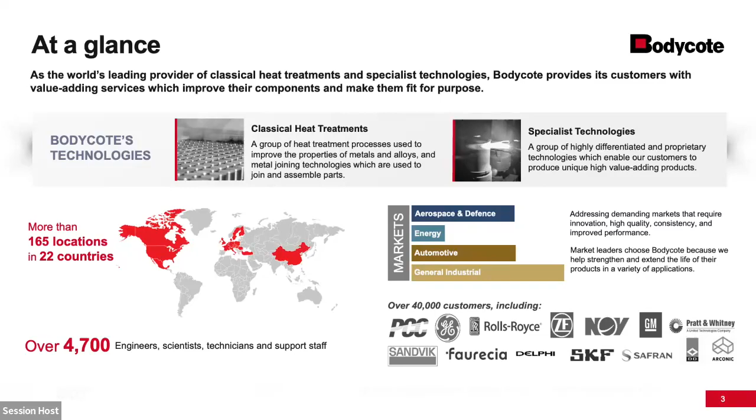Additive manufacturing might be a little basic for some folks, but over the last 10 to 20 years it has really blown up. We never used to consider traditional machining as subtractive. Now that we're in the additive world, some benefits include greater design freedom compared to conventional casting and machining, lightweighting, designing parts so material is applied only where needed, and better buy-to-fly ratios, which you have to think about with airplanes. You can combine parts into one, including new functions such as complex channels, which eliminates brazing and possibly EB welding or friction stir welding. The net shape process also helps reduce raw material use compared to machining.

Typical alloys used in the additive world are aluminum, titanium, cobalt chrome, maraging steel, nickel steels, and copper. All of this material needs post-processing before you can put it on an airplane, in a body, or wherever.

Adding value to additive manufacturing: Bodycote provides a complete service solution for metals built by additive manufacturing, including stress relief to minimize distortion and residual stress. We can EDM to prepare the component for hot isostatic pressing, also known as hipping, plus heat treatment and HIP to remove microporosity, along with associated quality assurance testing.

If you look on your left there, that's a typical build plate with some nozzles. The value add is a reduction in rejection rates and inspection costs. Fatigue properties are on par with wrought material, with significant improvement in fatigue strength, fracture toughness, and tensile ductility. A 100% reduction in porosity is possible, along with improved machined surfaces with consistency and properties.

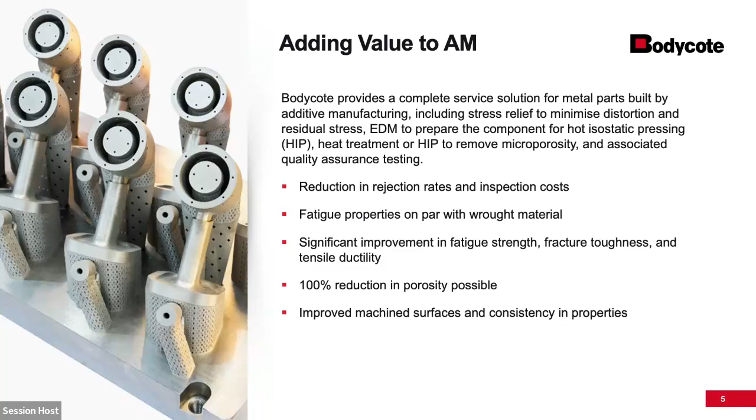So the process: metal additive manufacturing really boils down to two things, blown powder technology, DED or LMD, and powder bed. Most of what we see is typically powder bed technology, which can be broken out into electron beam melting (EBM), laser beam melting (LBM), or inkjet binder technology.

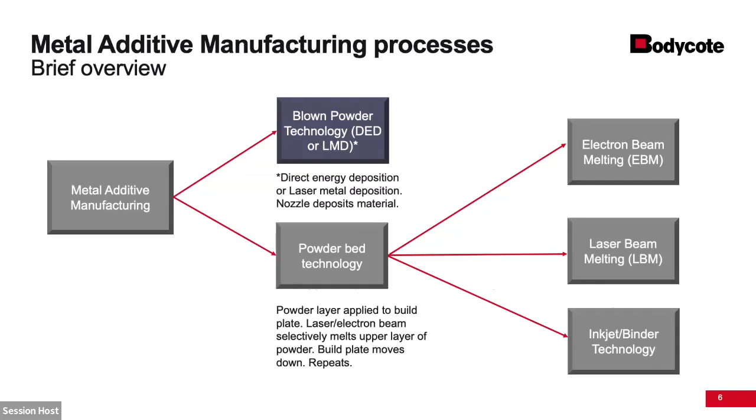So the value add portion, how do you get from the CAD design to an airplane? You've got your CAD model, your powders and grades, then you build your plate, and then the value add comes in with your heat treatment.

Your first step is a stress relieve. Then you roll it into a HIP for hot isostatic pressing, which gets rid of the porosity, followed by heat treatment to improve the microstructural properties. You wire EDM the part off the build plate, and the build plates are reusable. Then you do a materials lab and metallography analysis, and your parts are generally good to go on an aircraft.

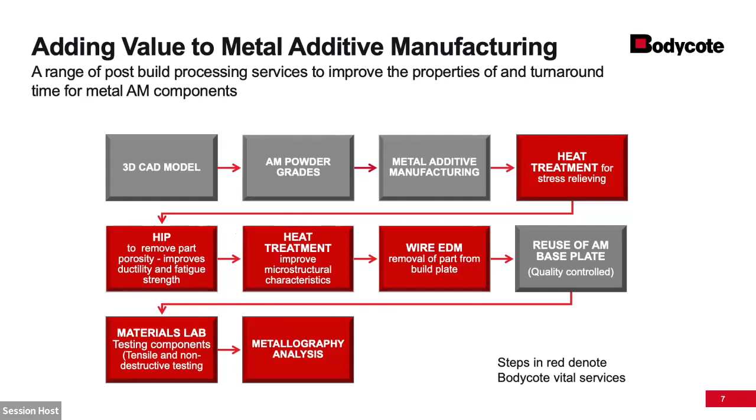Hipping, not sure how familiar you all are with that, but it's an absolutely necessary process. Turbine blades and vanes from the high temperature section of jet engines are routinely hipped to ensure freedom from microporosity. HIP is used to optimize the properties of the latest generations of single crystal and directionally solidified investment cast blades. Bodycote can work on cost-effective development of metals using HIP technology.

A few of our processes are trademarked. Densal is aluminum densification - not many people can do that, but we can - as well as densification of superalloys and titanium castings. Powder Met is the manufacture of complex net and near net shaped powder metallurgy components from novel materials. With Powder Met, we take the material, put it in a can, HIP it, and you end up with a near net part. We also offer HIP brazing and HIP cladding.

So if you're not familiar with a hip vessel, if you look to the left, it's generally a very tall cylinder. The part in the middle is your can. You load your parts in there.

We can run up to temperatures of 2000 C with isostatically applied gas pressure up to 45,000 PSI, so very high pressure. It's used to eliminate porosity in castings and consolidate powder metallurgy materials into fully dense components. Dissimilar metals can be bonded together to manufacture unique, cost-effective parts.

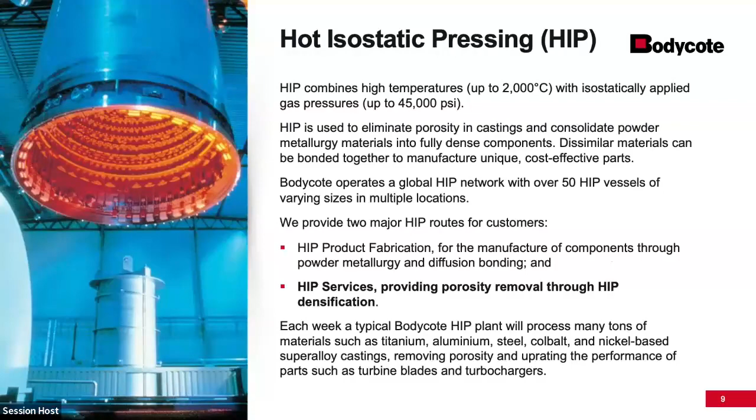So build plate removal and other value add. The parts are generally built up on a plate, and we have an alternative to standard EDM machine or bandsaw to cut the parts from the build plate. You maintain part integrity by ensuring the parts are undamaged during the cutting process.

You can separate laser powder bed fusion from large build plates up to 500 kilograms. The typical build plate when Additive came out was about 350 millimeters. They've grown significantly over time, and build plates are checked, serviced, and can be used again and again until you exceed your part thickness of the build plate.

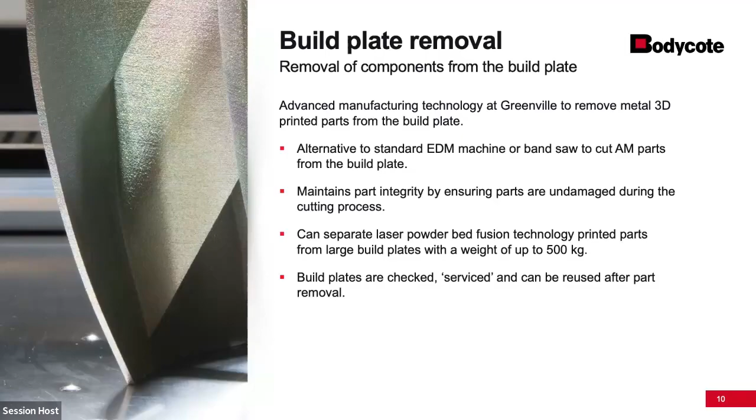So component journey - here's a typical part. You've got your 3D printed part. After that, the plate, you've got to build up.

It'll come over for a stress relieve, typically in vacuum. After that, the part will be EDM'd. It travels over to a hip for densification, back to a vacuum furnace to get your mechanical properties, off to a test house. After testing, maybe a final machine, and onto an engine blade somewhere on an aircraft, or from a medical standpoint, same thing - your hip, your elbows, and whatnot.

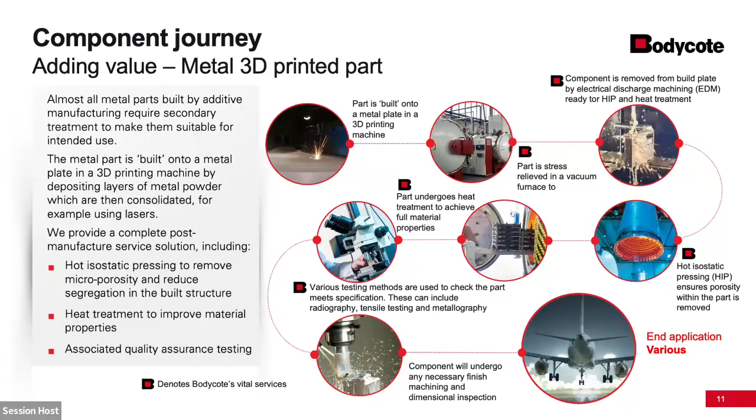So Bodycote Additive Centers - aerospace and defense, we're on commercial jet, space, military aircraft, armory and munitions, automotive, a lot of motorsports, cars and light trucks, motorbikes, heavy trucks, GI, general industrial, medical, food and beverage, tooling and mining and energy, stationary turbines, nuclear, oil and gas, and renewables.

Our biggest market right now is the aerospace and defense. Energy's quickly catching up, and space is a big one, just because you can scale up for space a lot easier than you can high production.

So Bodycote's Additive Centers of Excellence in the States. Greenville, South Carolina is a full service model, vertically integrated with hip production and vacuum. Cincinnati - product development, vacuum and aluminum. Berlin, Connecticut - vacuum and aluminum.

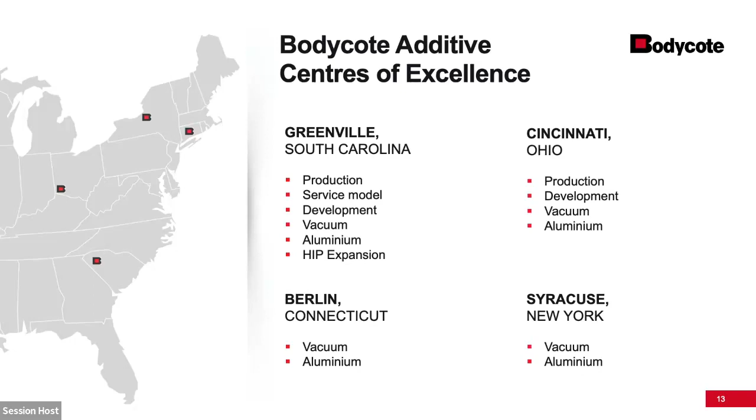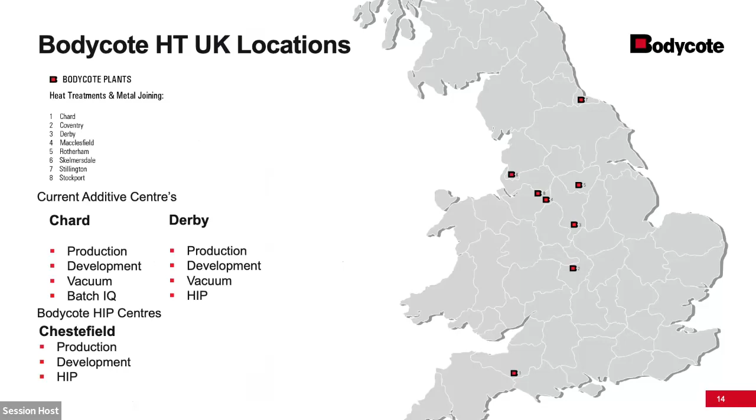So we like to take the heat treat away from you guys. Of course, it benefits us, but it helps with the carbon footprint. And we're supported with 4,700 employees, a lot of PhDs, metallurgists on staff to support your AM needs.

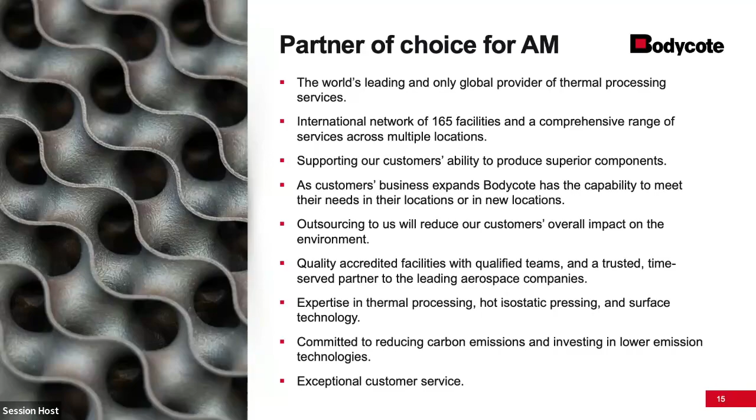That's a quick overview for the value add portion.

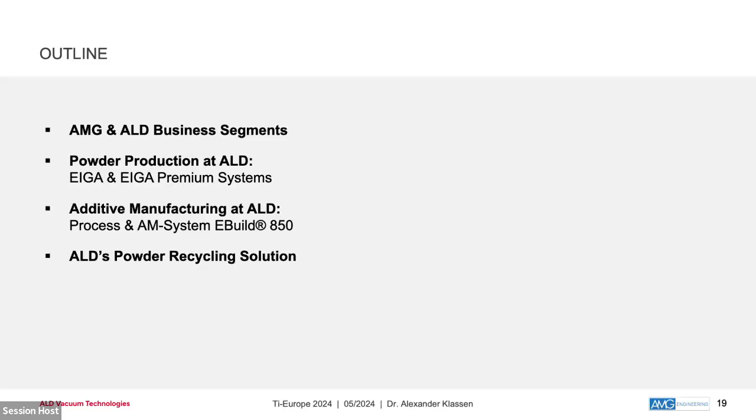A few words on AMG. This is the parent company of ALD. The two first main business segments are AMG Lithium and AMG Vanadium, so producing specialty materials, stretching out from mining activities to the processing of raw materials and pre-products. And this is accompanied by a third business segment, AMG Technologies, where we have all the machinery to process these materials.

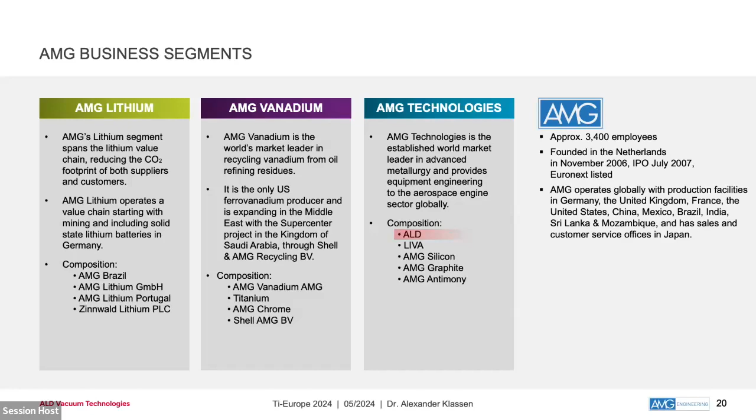So one of those companies in AMG Technologies is ALD. We are located near Frankfurt in Germany and have roughly about 900 employees. Our products are mainly in the segments of metallurgy and heat treatment. And the next slide, I'll show you the products that we offer. We offer also services to automation, after sales, melting services, and heat treatment services.

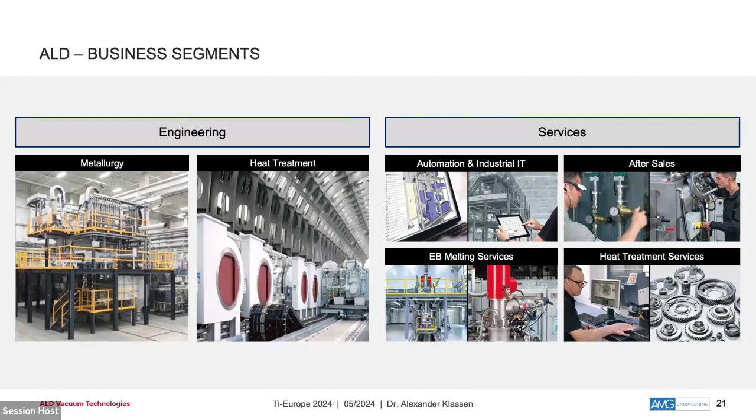This is just a brief overview of the machinery that we offer. We have systems for casting, for melting and remelting and refining, but also for heat treatment, coating, and even powder atomization. I will today focus on one of the systems shown here: a powder atomizer, and one very new system that didn't even make it to this overview, an additive manufacturing machine.

The process chain that I want to focus on starts at a raw material, some sort of prefabricated rods or ingots that are fed into a powder atomizer to produce metallic powder. And this powder can be used for various applications, amongst others, additive manufacturing.

So these are the two production systems. I picked an EIGA system, and I will show you later what it is and how it works. Of course, you can produce powder in various different ways. Naturally, the powder that comes out of an EIGA system cannot only be used for additive manufacturing using a powder bed, but it can also be used for metal injection molding and other processes. On the other hand, our additive manufacturing system cannot only utilize powder from an EIGA system—the powder can come from different sources. It will become clear during the course of my presentation why I picked those two systems.

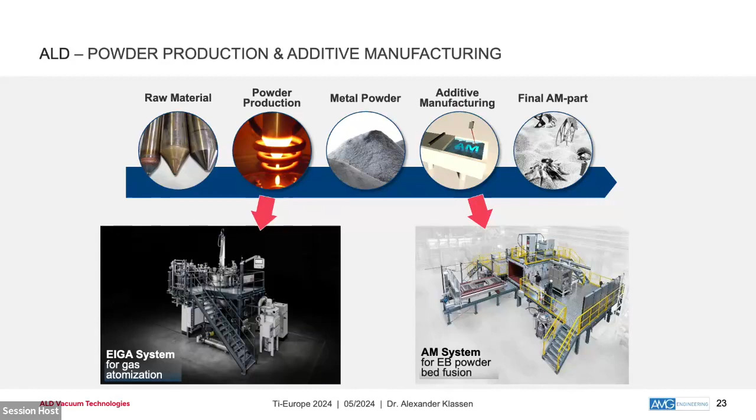So first, an EIGA system for powder production. Where are the benefits of this system? The action takes place up there where the melting chamber is and the nozzle is located. Down there you have the atomization tower where the molten powder falls in, and the collection system and sieving systems. The benefit of this system is that you atomize without having contact to a mold or a die. So you can produce powder that is prone to take other materials like ceramic particles or the like, and have a high purity of your material.

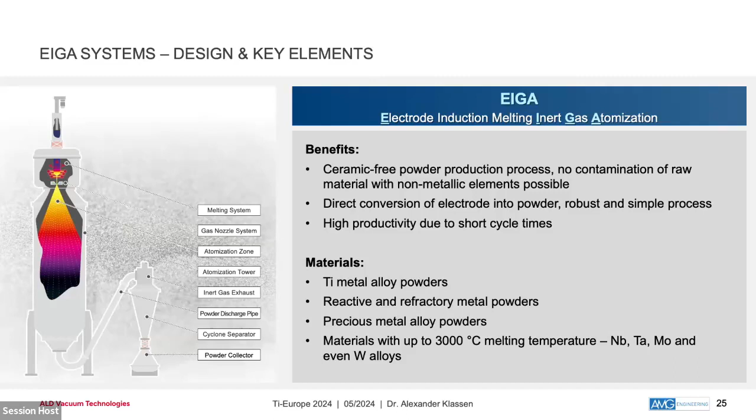So it's very much advantageous for reactive materials like titanium in this case, or also for refractory metals. The raw material or pre-processed material is an electrode feedstock—here it's just a rod with a conical tip. This is introduced into an induction coil that heats up the rod, and the melt stream that forms at the tip of the rod falls down and free falls through a nozzle without having contact to any other elements of the machine, and is then gas atomized using an inert gas stream.

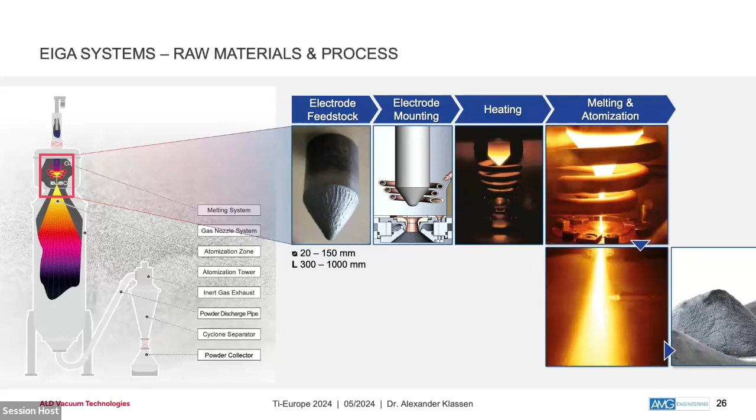Basically, we have two different EIGA systems. The standard system, which operates with hardly any overpressure in the melt chamber above, but then uses a high amount of inert gas for atomization. Here we can reach D50 values of 60 to 150 microns. So it can be set specifically where it is needed.

The second system is pretty new. It's an EIGA Premium with a modified nozzle system. It has a pressurized melt chamber with up to 25 bar, and for that a much reduced specific gas consumption, which lowers again the carbon footprint. The D50 values reachable are between 20 to 80 microns. So we have a shifted range of particle sizes that are achievable with this system.

Just to give you an example, this particle size distribution was produced for selective laser melting, so powder bed fusion process using a laser beam. The blue curve shows the standard EIGA system, and the green curve shows the EIGA Premium. So with the standard system, we can achieve a yield of about 40% that is usable for selective laser melting—the rest is out of spec, either fines or too coarse powder. With the EIGA Premium, we are now able to shift this and increase this number to over 60%.

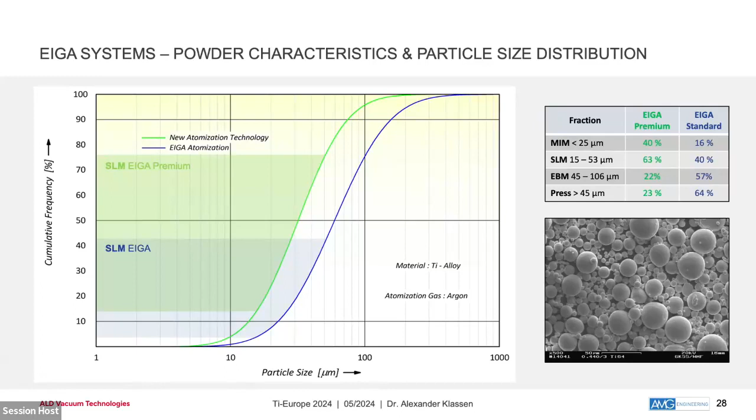You can do various things, amongst others, put it into an additive manufacturing machine.

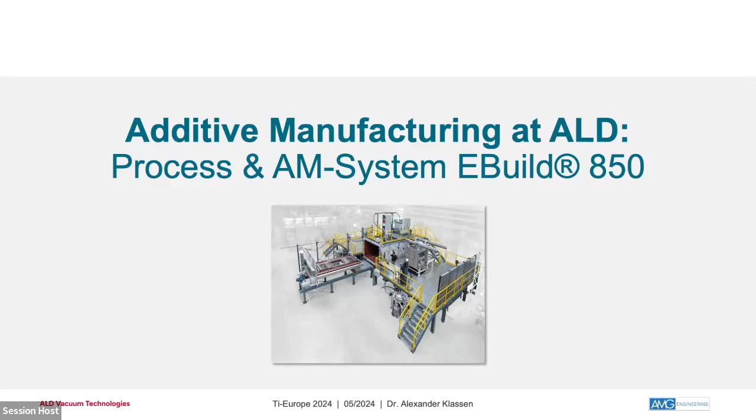The steps involved are powder application, then heating up the powder to a certain temperature, depending on the material at hand. We are usually in the range between 600, 700 degrees C operation temperature up to 1,200 degrees for titanium aluminides.

The electron beam has 3 tasks. The first is to preheat the powder. The second is to melt the powder in locations where it is needed. The third one is optional: you can do monitoring, using the electron beam like an SEM, a scanning electron microscope, just for monitoring reasons, to detect any defects like pores or other faults.

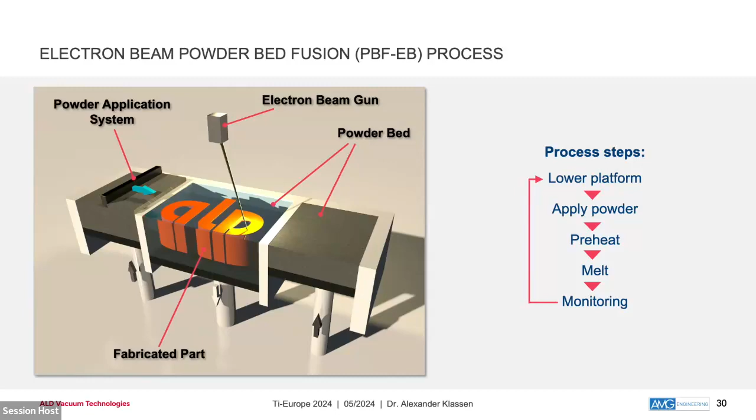The machine we built looks like that. So what you just saw on a slide earlier can be found here in the powder application system. Here we have the 3 compartments for the powder supply, and in the middle sits the build chamber. The powder application system is outside the machine just for maintenance reasons. It usually sits inside the vacuum chamber, which is located in the center.

We created this machine with 3 main goals: to be able to produce large parts, larger than what is found on the market, and with very high build rates. Also to use the unique features of the electron beam, like I said, for monitoring, and a better interaction with certain powder materials where laser beams are having trouble.

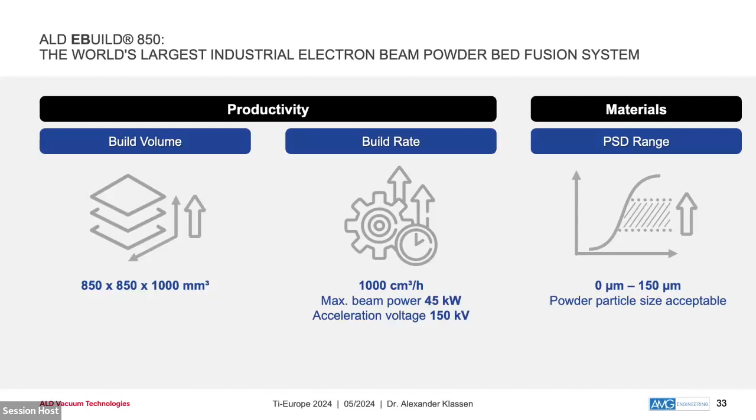of course, you can do standard additive manufacturing. In this case, it's just a demonstrator, a Ti-64 impeller built within 12 hours using 200 microns layer height. Typically, layers are up to 100 microns maximum. That's why we reach such a high build rate.

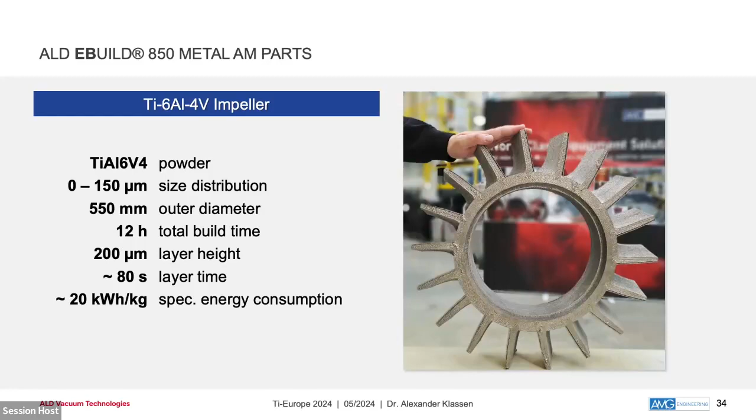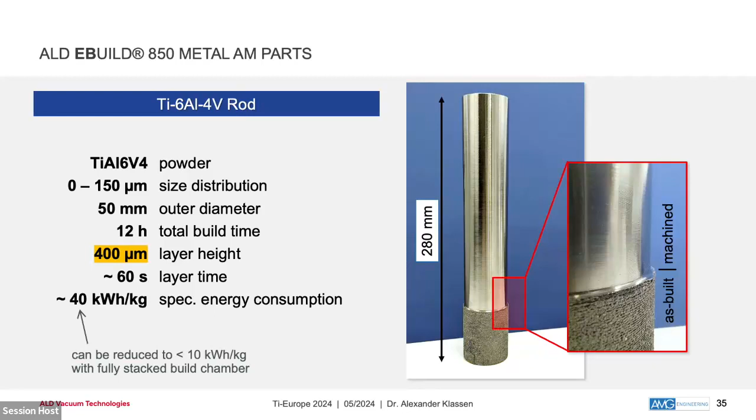Now the special application that we can use our system for is this production chain we saw earlier. Usually it's this linear approach, but between the last two steps, between the AM system and the final part, you can recycle the powder and reuse it again for upcoming processes.

But most of the powder after powder atomization is usually out of spec, so it's around the range of 60%. So you have to use the powder for either other processes or you have to recycle it in some way.

And we found a means for recycling by just putting it again back into the additive manufacturing system, which is what we can do. Why? Because of the missing restriction for the powder particle size distribution. Then we produce ingots again and put them back into the EIGA atomizer and close the material circle.

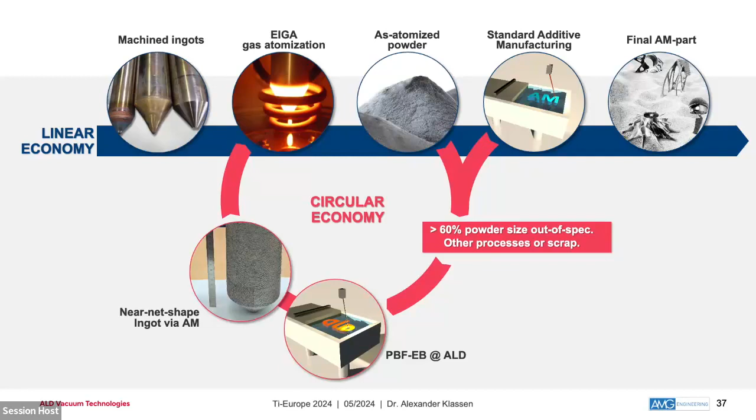How does this look like? You have the powder coming into the machine. The rods that we use are hollow inside, so they are not fully molten. They have a void where at the end the loose powder, which is then sintered, is located.

This is how a rod that has been molten inside an EIGA system, or atomized inside an EIGA system, looks like at the end with a molten tip. And inside you have this grayish area where the sintered powder is located.

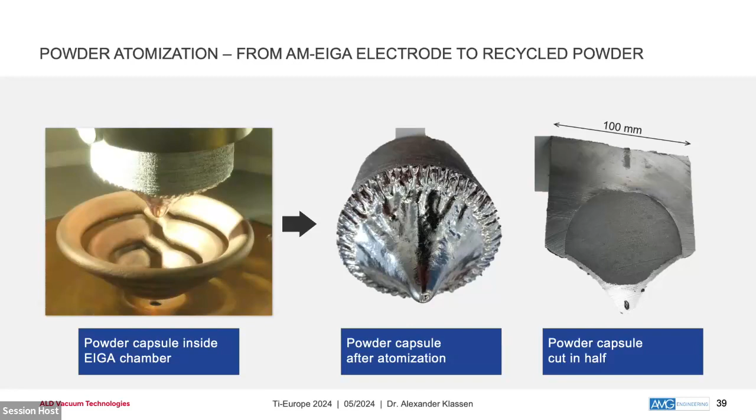Exactly. And surprisingly, what we found, we designed the process in a way that we aimed at a very low loss of volatile elements when dealing with some sort of alloys, and to have a very low pickup of oxygen.

These two elements were analyzed, and surprisingly, compared to the virgin powder that came in and the recycled powder that has gone through the additive manufacturing process and was atomized again, we have hardly any losses in volatile elements. This is Ti64, and the pickup of oxygen is also surprisingly low.

For this, we have a means of true recycling without having a downgraded powder at the end.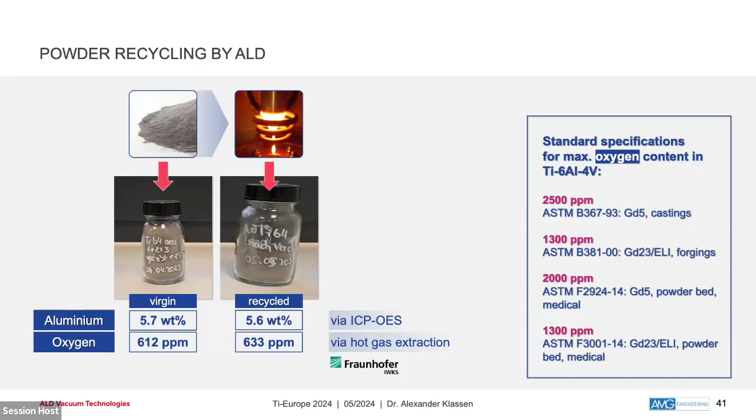To wrap this up, with the eBuild 850 we have a machine with the largest build volume currently available for powder bed fusion using an electron beam, having a build volume of 850mm and 1 meter in height. We reach high build rates of up to 1,000 cubic centimeters per hour, which makes it possible, for example, to do powder recycling in combination with an ALD system to have some sort of circular economy approach.

Thank you very much for your attention.

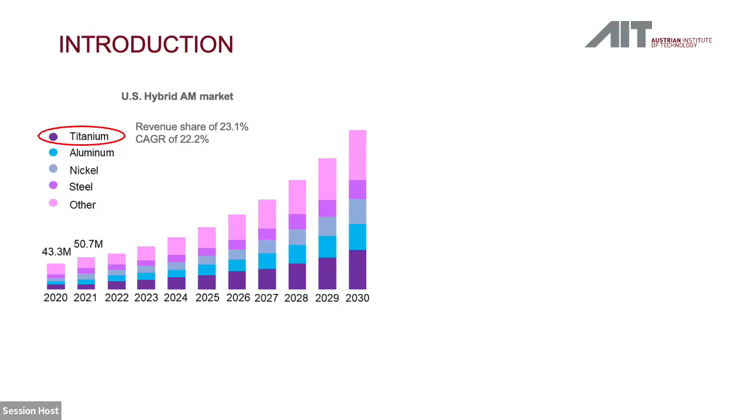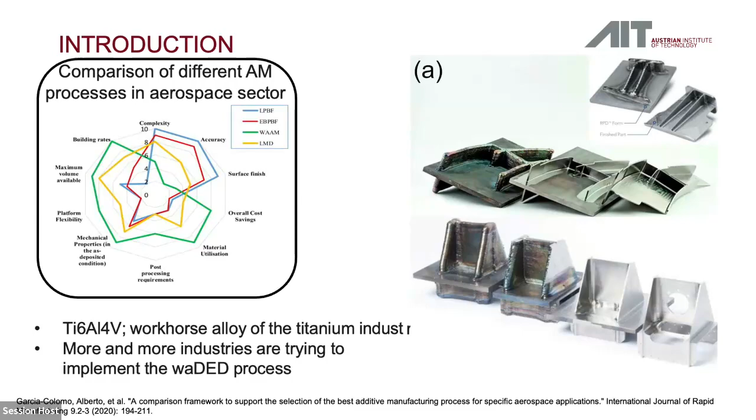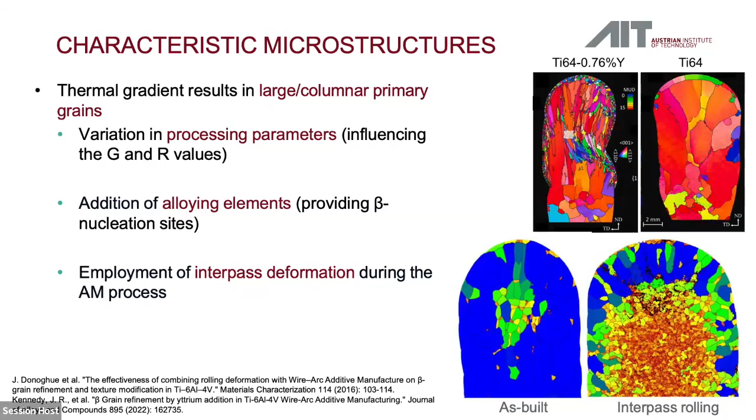For this talk, I will focus on the first part, so variation of processing parameters. And for this, I will start with showing you how the process we are using actually works.

That arc forms a droplet on the tip of the wire. Once this is formed, the wire moves forward and deposits this droplet into the melt pool. When this is happening, a short circuit is formed, and only once the wire is retracted does the arc reignite and the process starts anew. This sequence happens at 70 Hertz.

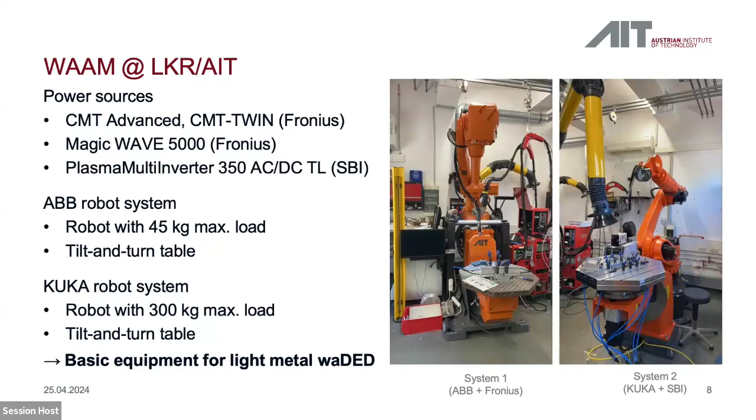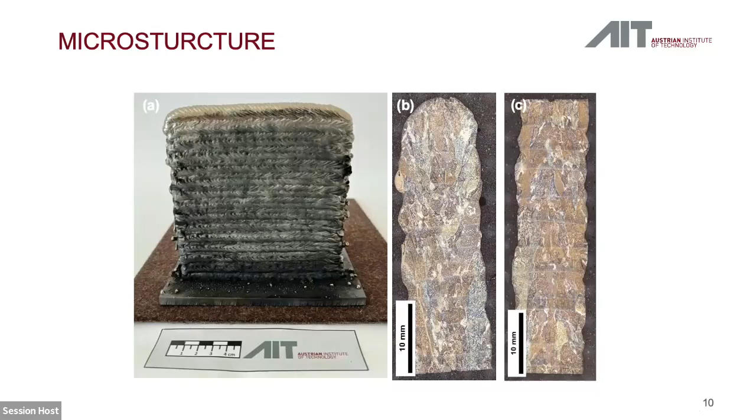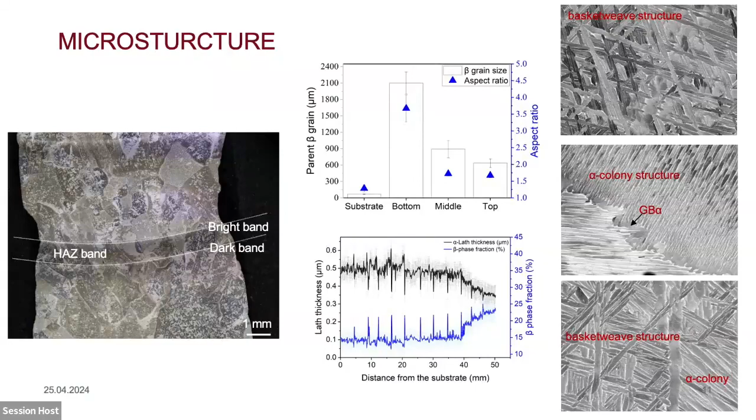But throughout the process, and the repetitive reheating of the material, this segregation gets less and less.

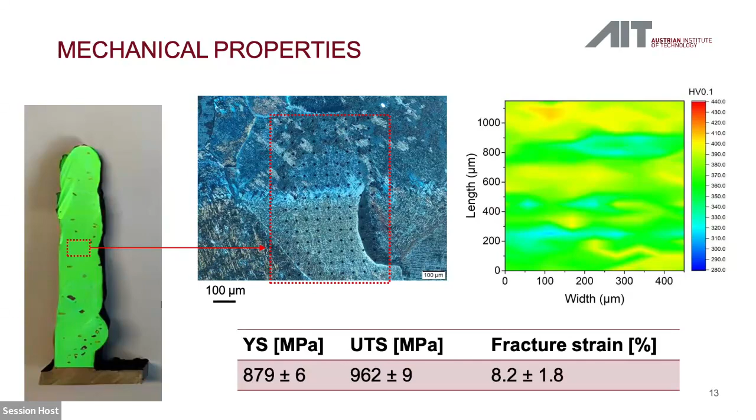Finally, I'd like to show you some of an ongoing study. We're looking at fatigue properties of the material. If you take a look at the graph on the left-hand side, there were samples extracted in different orientations of the build. You don't see a pronounced trend, which is good because there is no anisotropy in terms of fatigue properties. What is interesting to note is the fracture surface.

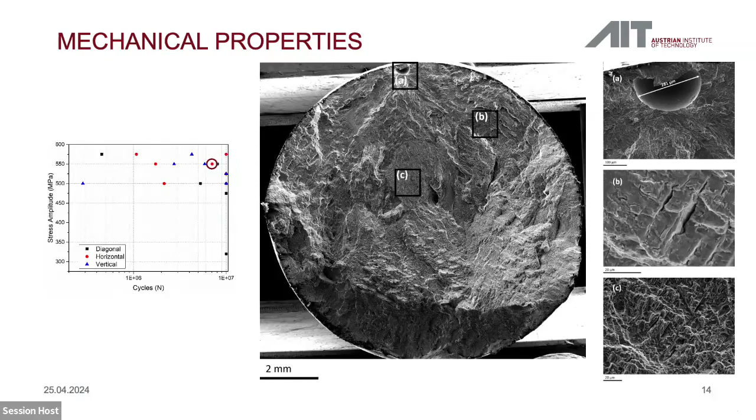This one corresponds to the spot over here. It has quite a long cycle duration, but effectively it had a pore close to the surface with above 200 micrometers diameter. If you look at the next one, this had a lifetime like 1/5 of the other at the same stress level, and the defect that we found was 1/10 in size.

This is quite surprising at first, but if you look in detail, you can see that the pore that initiated the crack was located at a prior beta grain boundary. This is something that can happen—shouldn't, but statistically it can—and this is why this sample failed earlier than the other.

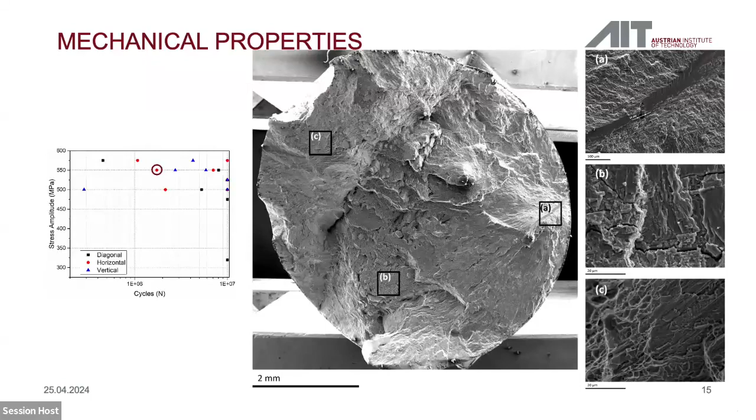Finally, some conclusions, and I will start with the lowest one. I hope I could show you that cold metal transfer is capable of producing structures from titanium alloys, titanium 6-4, in the present study. The anisotropy is weak, but should be improved, and particularly we should be looking at fracture strain properties.

Specifically, cold metal transfer is capable of breaking epitaxially grown grains in comparison to, for example, plasma-based processes. And we have used a number of microstructural as well as mechanical characterization tools to better understand the microstructure and properties of the material.

I would like to thank the Federal Ministry for funding this research. It is co-funded by industry. We're running this project together with 26 partners, which I can tell you is a challenge for coordination, but it's also giving us some very good results.

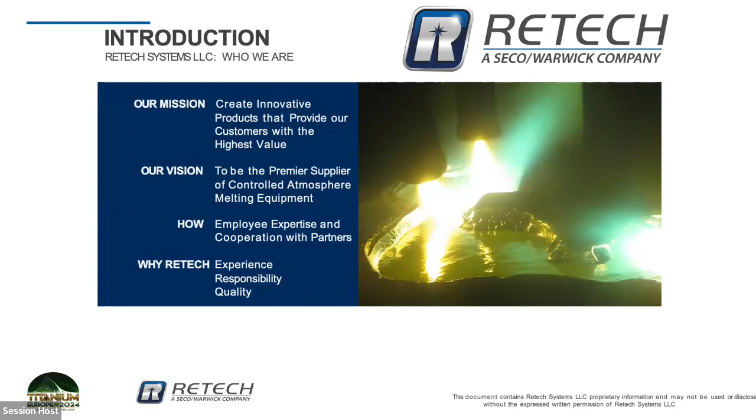In terms of the products that Retech produces, if you're not familiar with us, we're predominantly a vacuum and controlled atmosphere melting equipment supplier. We supply the titanium industry predominantly, and other industries as well—medical, defense, consumer electronics, etc.

And the products that we supply are vacuum arc remelting, plasma arc melting, and E-beam, which is very familiar to this industry, as well as vacuum induction melting and powder systems. The way we structure our philosophy here is that we have deep knowledge in melting and casting, and we want to take that knowledge base and apply it to the powder products that we supply. So what's the problem statement?

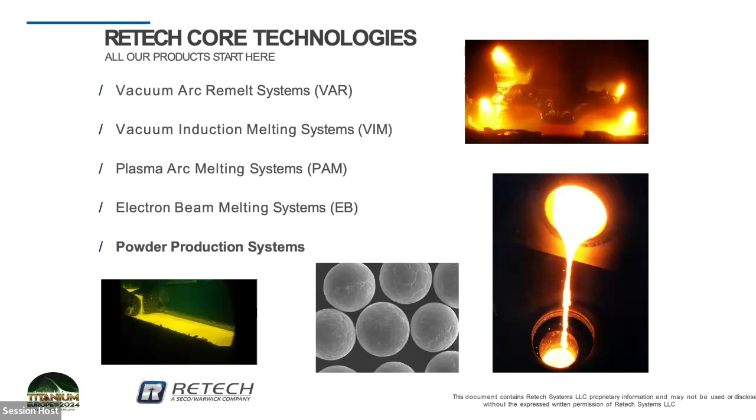As I mentioned at the beginning, there's an opportunity for us to increase the usage of titanium powder across the industry, and I'm happy to see some of our colleagues here on the panel talk about that already. One way we can increase usage is to drive the costs down. In addition, we have to maintain or improve the quality. Some of it's particle size distribution related, some of it's oxygen, but we really need to understand how we can control and improve the quality of the powder so we can make really high quality parts for demanding applications.

And then sustainability—the talk right before us really highlighted the need for reducing CO2 emissions and being able to control the total input of energy to producing a net part from raw material. One of the ways we think we can address all of these challenges is with a powder atomizer and powder consolidator system that allows us to produce a circular process.

So a very brief overview of powders. Essentially, the way we make powders is using high energy to take bulk material and make it into finer material. There are a variety of different ways: gas atomization—in the powder metallurgy business, water atomization is maybe 80 to 90% of the processing modality—centrifugal atomization, crushing and spheridization, and a few others.

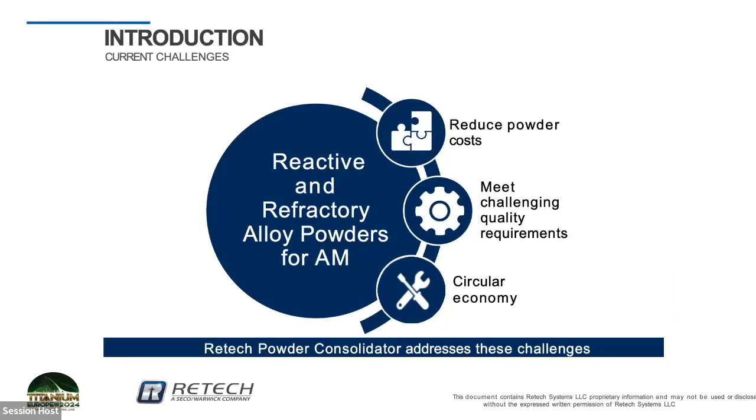Initially I mentioned that we're leaders in melting technologies. We want to leverage that to produce a production scale atomizer for titanium. The process essentially allows us to take low-cost feed, for example scrap or revert material for titanium, introduce it into a cold hearth to minimize oxygen and ceramic contamination, and then take molten metal and process that through a gas die. The gas die has the capability of tuning the particle size distribution so we can produce a broad range of particle sizes for different additive manufacturing methods.

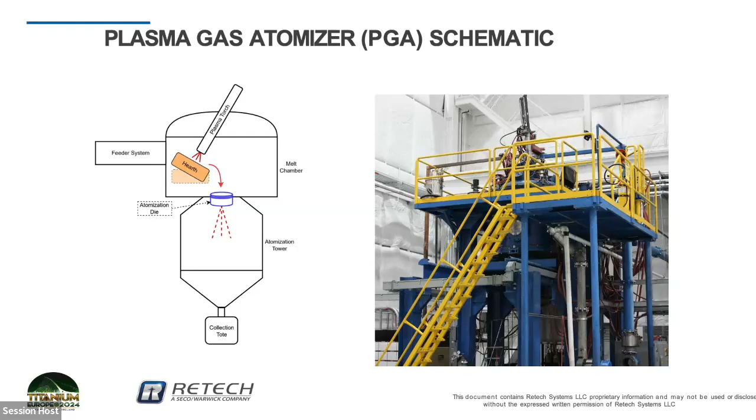So if I compare these technologies to what I'd call the state of the art for producing titanium, such as wire atomization or electrode atomization and vacuum induction melting, the PGA system allows us to use raw material feedstock in a broad configuration, so we can really bring the costs down.

If we use scrap—yesterday's talk had a description that about 95% of the CO2 input is lower for scrap versus raw sponge and master alloy. So it's really exciting to be able to use low-cost feed.

In addition to that, because we have plasma melting, we can really enhance the throughput on these systems. Traditionally, for making titanium ingot and bar, we use plasma at scales of thousands of kilograms an hour, and so we can leverage that capability to produce powder at scale.

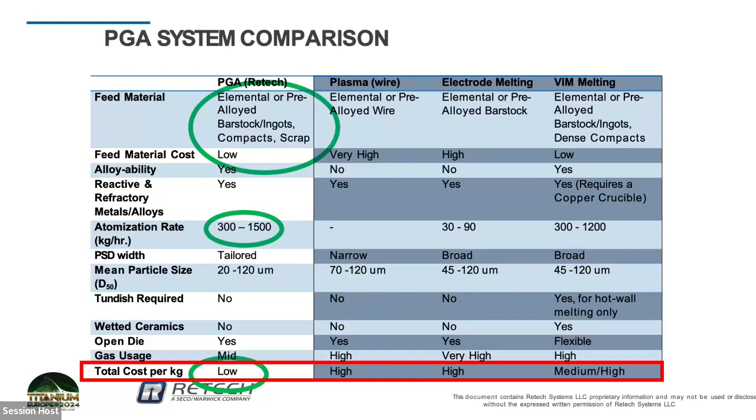I mentioned the flexibility of producing a variety of different particle sizes using the efficient gas die. Overall, as you stack all of these benefits, you can come to a lower total cost for titanium powder. Some examples of feedstock we could use in a plasma gas atomizer are machine turnings, cuttings and trimmings from plate, and some small scrap parts from additive manufacturing builds.

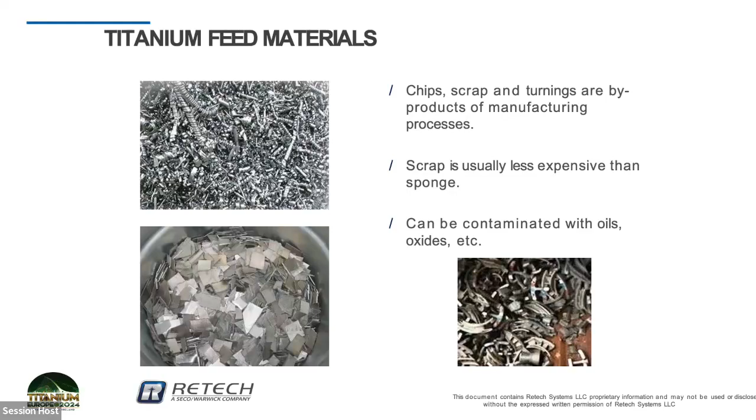So it gives you a lot of flexibility to use a variety of different feedstock. Overall, the benefits of the PGA are that we can use PAM technology, which is a mature melting technology, to produce reactive and refractory alloys, including titanium.

The process is inherently scalable, which is critical for us to take the powder solutions to a production scale. Overall, we are able to control costs by improving the feedstock requirements and the ability to control particle size distribution, which is critical. The ability to melt in a plasma system opens up the types of alloys you can produce. Because of the flexibility of feed, you don't have to pre-alloy your feedstock, which allows you to use complex feedstocks to alloy in situ in the hearth.

And so if you can take the out-of-spec powder back and use the high quality that you already have with the powder, bringing it back into a solid form, there's value there. So we've developed a system called a powder consolidator that takes oversized powder and reintroduces it into a melt and produces ingot.

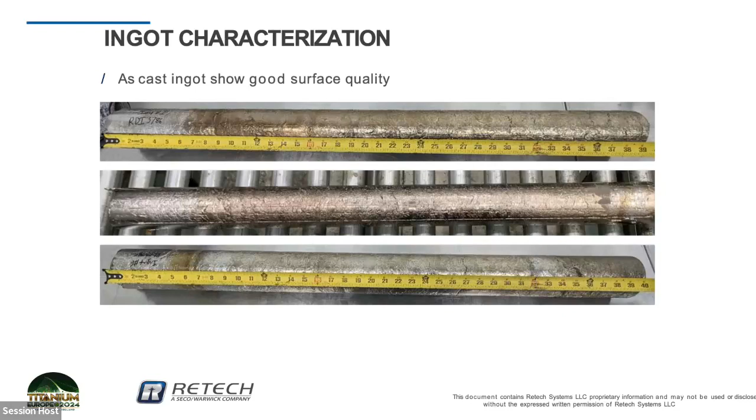I'll emphasize that everything we do at Retech focuses on trying to make sure that we can scale, because that's what our customers are demanding. And so this consolidator system has the capability of scaling all the way from 65 tons to about 550 tons a year.

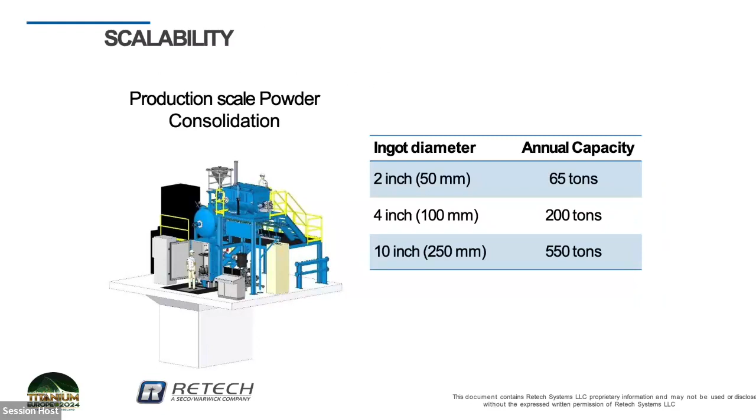So the ability to take oversized powder, which has very high purity, and bring it back into a high value product like a bar that can then be used to produce powder or convert into wire, or even being used as the mill product, is very, very interesting.

The quality of the ingots produced are fairly high, so that can be used with minimal additional processing for other downstream high value products. And we'll continue to look at various other alloys that we can consolidate using this process.

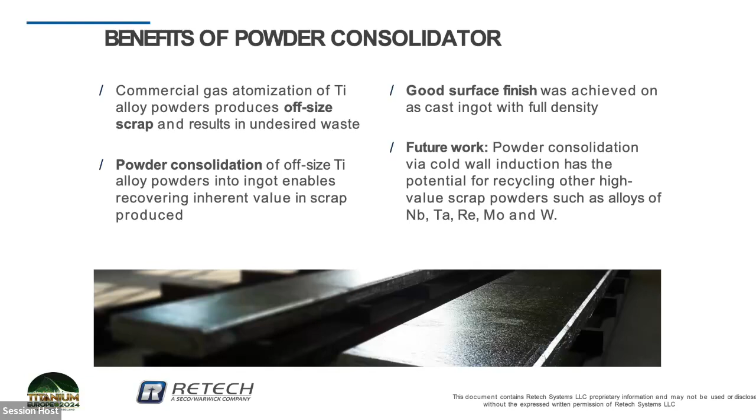So, if I were to wrap the talk up into an overall summary, the PGA and the consolidator allow us to create a holistic cyclical process where we take low-cost feed, introduce that feed into a plasma hearth melt that has a fairly high melt rate, then produce powders at scale. Taking that powder, we print with it or use it in other applications like MIM or HIP, then take any oversized powder from that process, put it back right into the recycled stream, consolidate it, and take that oversized powder or ingot back into the atomizer. This gives us flexibility and a closed loop, minimizing our overall cost of the process, decreasing energy consumption, and hopefully increasing the adoption of titanium powder across our industry.

With that, I'll close my talk, and if there are any questions, I guess we can take them after. I'll keep my slide up for my contact information.

Thank you, Amir. Last but not least is Carl Boehlert, professor, Michigan State University, and his topic will be characterization of the microstructure, tensile, fatigue, and creep behavior of powder metallurgy processed rolled and extruded Ti-64-1B alloys.

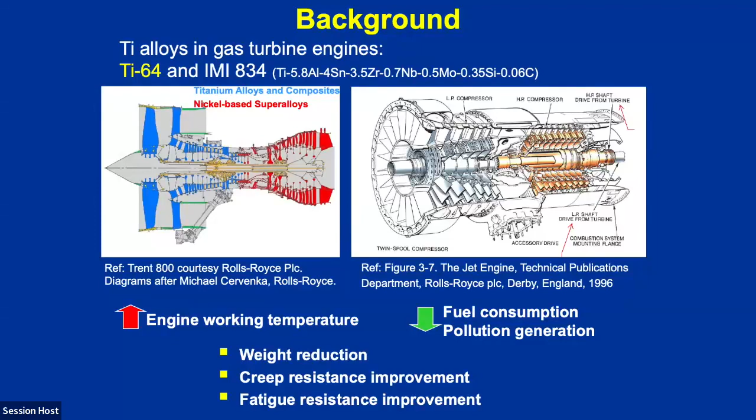Really, the grandfather of boron modified titanium is Professor Saito, or Dr. Saito, in Japan, who pushed forward this technique in the early 2000s so that it's used in the automotive industry, in the Altezza, as an intake and exhaust valve. What he started with was a blended elemental powder metallurgy process for manufacturing these engine valves.

He walked through the blended elemental technique with these powders: mixed them, compacted them, vacuum sintered them using traditional powder metallurgy technology, made it into a billet, then hot worked it, heat treated it, and machine coated it.

It offered significant savings in terms of performance based on stiffness, strength, and weight. That's one of the success stories for this boron modified titanium technology.

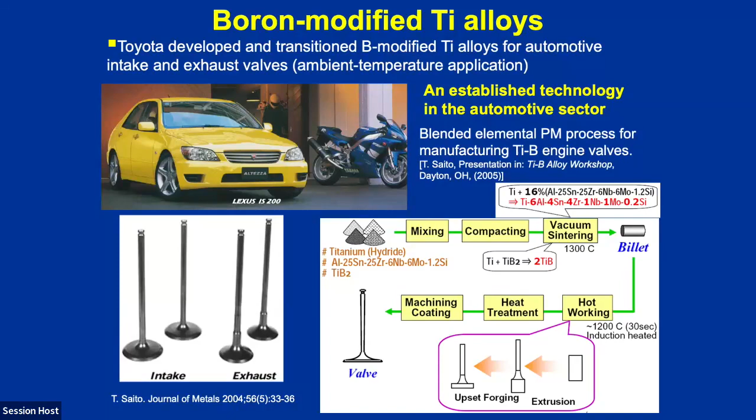Now, adding boron can be done in a variety of processing techniques, whether it's casting or powder metallurgy, and powder metallurgy in the form of pre-alloyed powder or blended elemental powder like in the last slide. In each case, we can go through traditional physical metallurgy processing techniques and end up with a wrought product with significant advantages.

Higher specific stiffness: by only adding 1 weight percent boron, we can get up to 15% stiffness increase in strength, and up to 50% or higher compared to most other titanium alloys.

The trick is this: because it's an inoculant, when you put it in a casting, you can get significantly reduced grain size, on the order of magnitude smaller than without the 1% or 0.1% boron. The trick is to add the amount of boron you want in the material for the performance you want. The more boron you add, the more ductility decreases, but you get higher strength and higher stiffness.

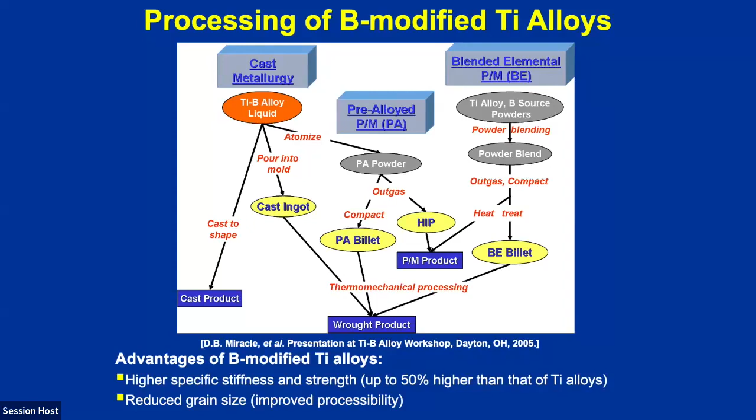So there's a variety of different applications this can be used for. It won't increase the weight too much—boron is lighter weight—and it won't increase the cost too much. But if you start with a smaller grain size in your casting, you don't need as much wrought processing, or can even avoid wrought processing altogether, which is a significant cost savings.

In this work, Wei Chen evaluated a bunch of different compositions and processing techniques, a couple based on powder metallurgy. He wanted to understand the processing effects on elevated temperature, fatigue, and creep behavior to see if we could use this at elevated temperatures, and also to evaluate the amount of boron that could be used to determine the optimal content for elevated temperature, creep, and fatigue behavior.

We looked in particular at powder metallurgy rolled plate versus powder metallurgy extrusions, and compared that to cast material. On the left is powder metallurgy rolled Ti-64 with 1% boron, and on the right is powder metallurgy extruded Ti-64 with 1% boron, by weight percent.

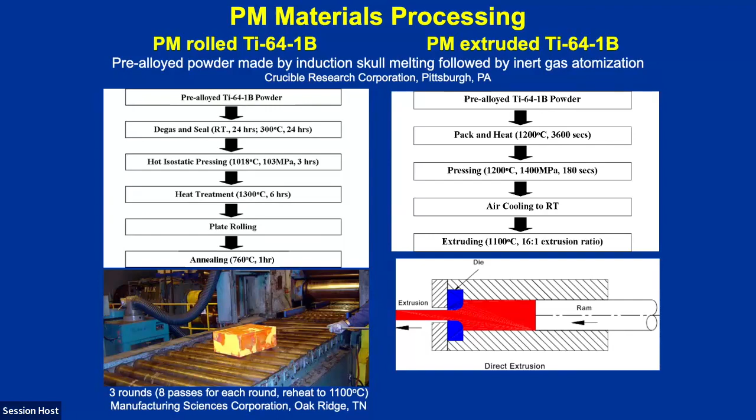We've seen a lot of talks about processing, and there's no significant difference here. This is the rolled material—we typically start with a rolled billet, go through rolling, and reduce it without seeing much cracking at all. Same thing with extrusions. We're going to talk about differences in texture caused by rolling versus extrusion, where the extrusion resulted in a significant change in texture compared to the rolled material.

Here's a picture of the microstructures. On the left is the 641 boron with the rolled, and this is on the right. It was extruded in this direction and rolled in this direction. You can see that there's a strong difference in the microstructures.

In these backscattered images, the black is the titanium borides, as the boron tends to form TiB or TiB2. In this case, it's TiB. They are significantly aligned in the extrusion with respect to the extrusion axis, but that wasn't the case in the rolled plate. In addition, we can have texture within the matrix, which is the alpha beta matrix.

We found that for the same magnification, you can see a much finer alpha grain size on the order of 3.6 microns, and it's double or higher in the rolled condition. If we look back, the temperatures were relatively consistent between the two, up to 1200 degrees C for the processing, so that may have an effect on the grain size. But for sure, whether we have 0.1 boron or 1 boron, we get whiskers that are aligned with the extrusion direction.

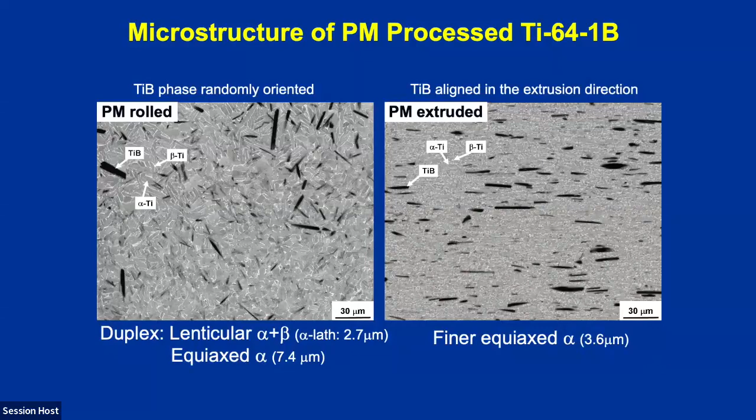This, we're going to find out later, is the stiffest direction for the titanium boride phase, which results in even higher stiffening than when you have a randomly oriented whisker. Roughly the volume fraction is the same of the titanium boride phase in both microstructures.

If we look at this texture, we can look at it from EBSD or from X-ray diffraction. This is the PM rolled in the longitudinal direction, and the transverse in the rolled face. We didn't see a very strong texture develop in this material. If you look at the extruded though, both the alpha phase was strongly textured, and we already see the morphology of the titanium boride whiskers.

The alpha phase titanium, this is an inverse pole figure from EBSD, was strongly textured with the basal plane perpendicular to the extrusion direction. That has implications on the slip systems and the ductility that would come out of that.

If you look at the titanium boride phase, we know that it was strongly textured with their line direction with respect to the extrusion direction, and the 020 is the growth direction of the TiB phase.

If this basal slip would be prevented if it was perpendicular to extrusion direction, in the extrusion direction, if we did a tensile test in that direction, that would mean we'd have limited ductility and perhaps higher strength. We know this because of the literature.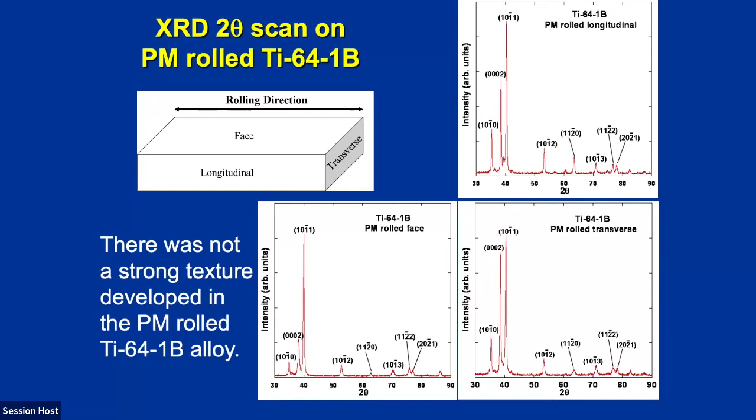At elevated temperature, we can get A and C plus A slip in the alpha phase, where C plus A slip tends to be more difficult. With increased temperature, the critical resolved shear stress decreases for all the slip systems, and it decreases significantly even for the C plus A slip. The alpha basal plane, when it's oriented perpendicular to the extrusion axis, A slip is not possible. Therefore, we could have a reduction in the elongation at failure.

After the transformation, it would be expected that the 002 basal plane is oriented 0 or 90 degrees to the extrusion axis. This would result in what we call a hard orientation, something that would be highly strong, but may not be the best in terms of ductility.

When we look at this, on the left is elevated temperature tensile tests for materials that are cast, and CE stands for cast and extruded. We have no boron, 0.1 boron, and then 1 weight percent boron. First of all, the as-cast material, in the cast and extruded material right there, has the lowest ductility. That's because of this orientation effect, the texturing effect of the alpha phase, as well as the highly textured TiB phase.

What we see at the top here is that we can get cast and extruded with 1 boron to have strengths on the order of 800 megapascals at 455 degrees C, and it's relatively ductile, 10% elongation. If we look at just the cast and extruded without boron, we get a slightly lower strength. With 0.1 boron, we gain a little bit more strength.

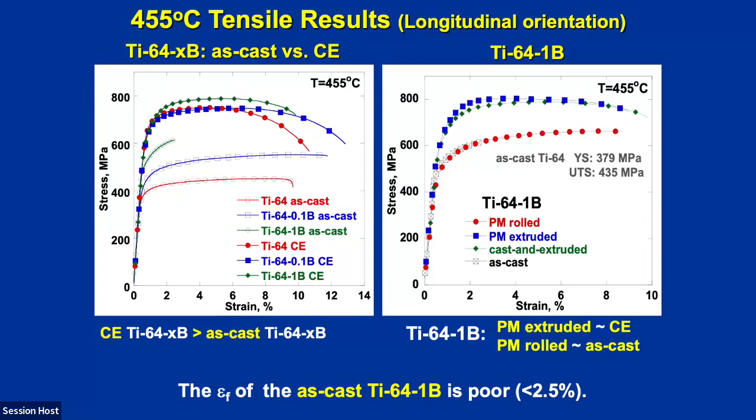If we look in terms of stiffness, the more boron we add, the higher the stiffness, where we can obtain Young's modulus values on the order of 117 gigapascals or 113 gigapascals, whereas the 6-4 without any boron is going to be on the order of 90. So we're gaining roughly 20% stiffness by adding in the boron.

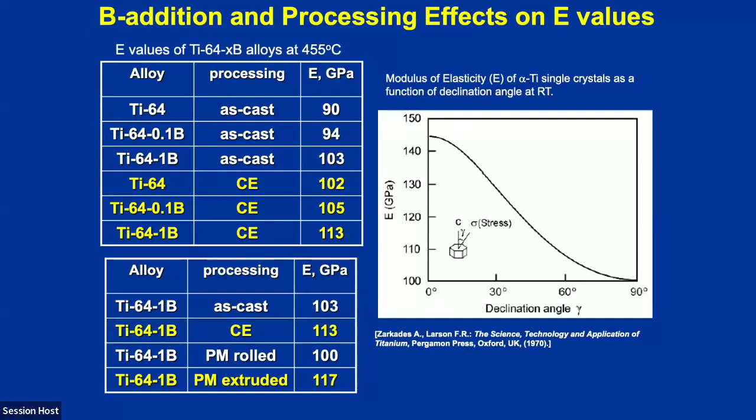If we look at the tensile tests, we've done a lot of experiments in situ to evaluate the damage progression in the materials, and we find, as no surprise, that this TiB is a reinforcing phase. It's very hard and very strong, and therefore it's taking on the load from the matrix. As it takes on the load from the matrix, it tends to develop cracks first in the material, and we can see the cracking that happens throughout the titanium boride.

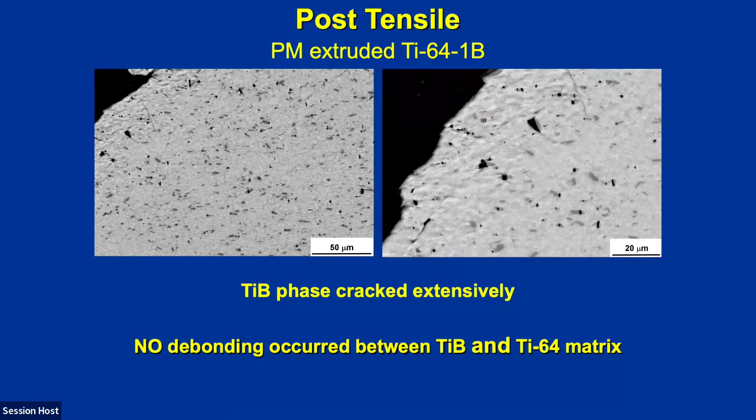Eventually, when the titanium boride cracks enough, it will shed load back to the matrix, and then it causes failure in the part. If we look at the fatigue behavior, that was a big question for aerospace. We get improvements in stiffness, we get improvements in tensile strength without too much of a debit in the elongation to failure. But what's going to happen in fatigue with these titanium borides? Is it going to be able to fly?

So we did a lot of testing at 455 degrees C, tensile type of testing with an R stress ratio of 0.1, meaning we never went into compression, 5 hertz frequency, 2 repeats per condition. Before we started the test, we had this type of information for titanium alloys: typically wrought titanium alloys are orders of magnitude higher in fatigue life at the same stress level than cast materials, with powders sitting somewhere in between. So how would this translate?

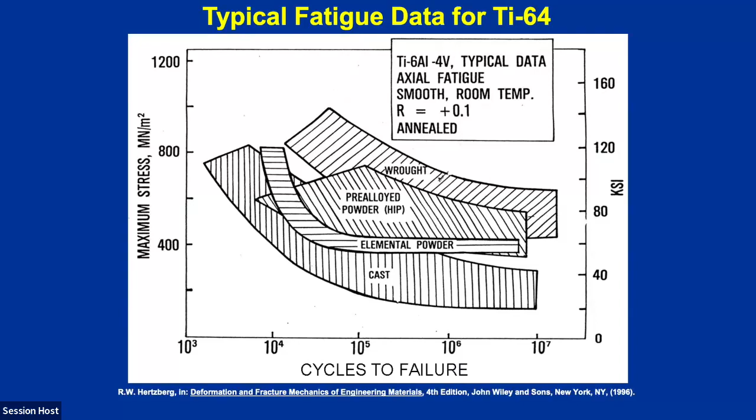By adding in boron, on the left-hand side we have fatigue tests, tension again, just like the tension tests, but at 455 degrees C, looking at cycles to failure versus maximum applied stress. There are some interesting features. First of all, the as-cast had the lowest fatigue threshold stress, and the highest one was the powder metallurgy extruded, which was the same as the cast and extruded 6-4-1 boron.

So it turns out we didn't get a debit in comparison with this PM extruded material in terms of fatigue life at 455 degrees C, and the PM rolled, which also had subpar performance in tensile testing at 455 degrees C, had a slight debit in fatigue life versus the PM extruded material. Of course we could do more tests, but this is a good indication that we have higher fatigue threshold stresses in the PM extruded than the PM rolled. This is, again, just a repeat of the tensile tests.

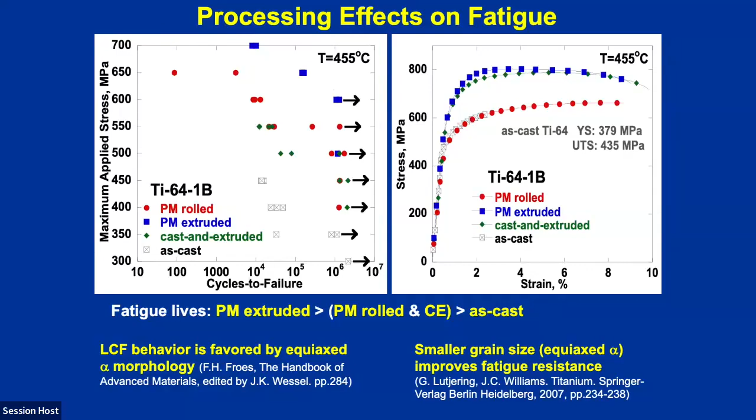So it looks like this PM extruded material would be the optimal material in terms of highest stiffness and highest mechanical performance.

One of the things we could look at in terms of the processing and deformation behavior was how dislocations build up within the microstructure. We know that titanium boride whiskers impede dislocation motion. They have an orthorhombic structure and don't have many slip systems. We've seen buildup at titanium boride whiskers in terms of the dislocations trapped in them, and we've also looked at dislocation structures, which typically form and are confined within the alpha-beta phase, confined between these whiskers.

Reducing the as-cast grain size can help reduce the dislocation slip length, reducing the stress concentrations and reducing the ability to crack. That's a good thing in terms of fatigue or tension.

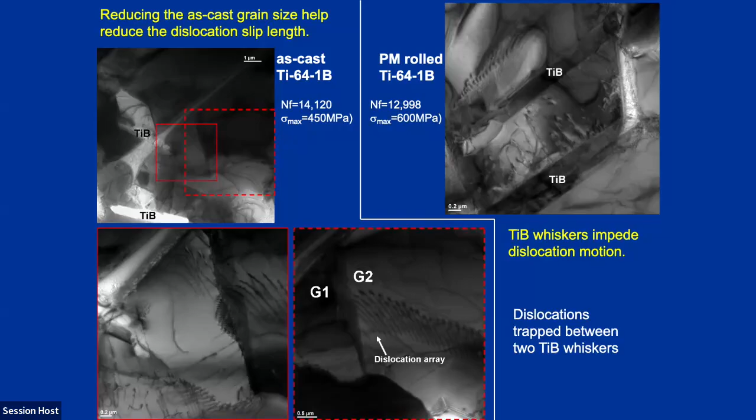I'm glad that Thomas Klein showed some fracture surfaces and fatigue earlier. We have very similar features, whether you add boron or don't add boron in Ti-6-4, compared to his wire AM materials. The cracks, as we saw in tension, typically initiated at whiskers, and they were typically close to the fracture surface, but we still could get ductile type of failure away from the crack initiation site. We did see some fatigue striations. There wasn't anything too surprising in this, but it wasn't terrible.

That initiation was always something that was a detrimental effect at the titanium boride whiskers.

In terms of the creep behavior, again, we looked at 455 degrees C, and we looked at 400 megapascals for our applied stress in this case, and 450 in this particular case. These are just one-off tests. We did a bunch of tests, but I want to show you these representative ones. The first one is the cast and extruded.

That one had the best creep resistance, followed by the PM rolled. It turned out in this particular case for creep, the PM extruded material had a higher creep rate and a lower creep resistance than the cast and extruded, all for the 6-4-1 boron concentration. So it looks like the extruded material in the powder metallurgy is going to be worse in creep than the cast and extruded or the rolled and extruded material.

That was also true at a slightly higher stress, 450 MPa, though there was a slight shift in the extrusion versus the rolling in this particular case. We've done a bunch of tests to identify the activation energies and understand the deformation mechanisms, published in different articles. It's improved by the addition of the lenticular alpha phase. We know that from past research, and therefore that's an important component to control the alpha morphology.

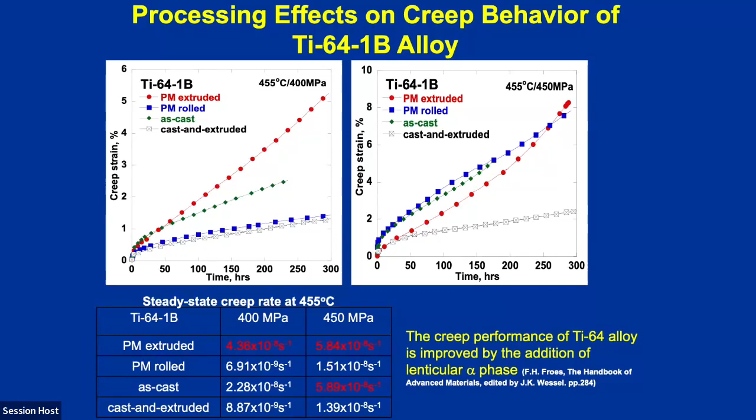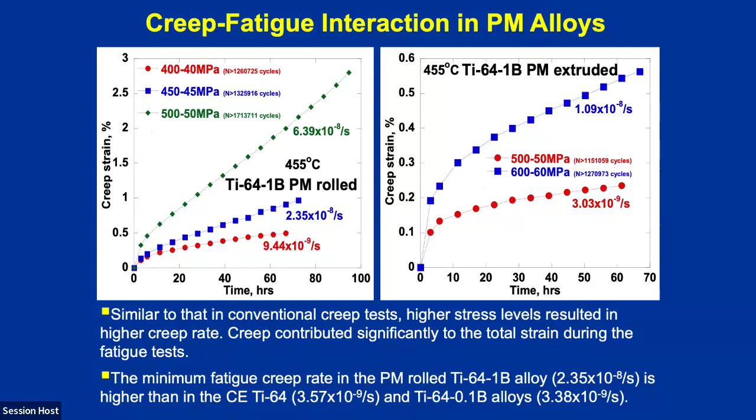To conclude, processing significantly influenced the fatigue behavior of Ti-6-4, where PM processing induced an equiaxed grain size that results in enhanced fatigue lives compared to the cast metallurgy. The finest equiaxed microstructure resulted in the greatest fatigue lives. The texture induced through extrusion enhanced the tensile and fatigue strengths by aligning the alpha phase and the TiB phase into what's called hard orientations, where we don't see as much slip happening.

The extruded alloys exhibited tensile anisotropy, where the extrusion directions were stronger than the transverse orientations, and they were also less ductile than the transverse orientations.

Overall, I think that this is still an important technology that hasn't reached its fruition. By adding boron into titanium, we can process it in the same way as conventional titanium, and we can get enhancements in the properties. So I think it still has potential use.